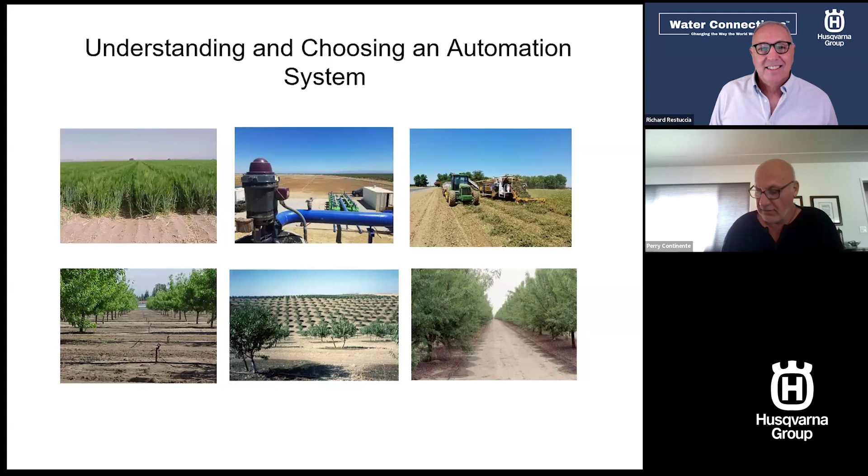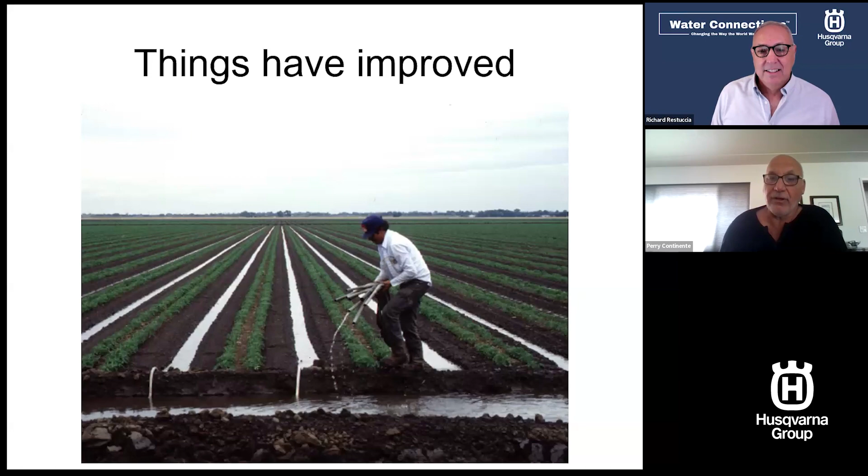Okay, first of all, this is an old picture of the way it used to be done pretty much everywhere. And first of all, is your system automatable? Can you automate a system? Well, this system obviously cannot be automated. Is your system worth automating? I mean, the first thing you want to do is make sure that your system is sound, has high uniformity, a proper application rate. And before you move towards automation, make sure that you're not spending money on something that needs to be fixed from the ground up.

Perry, if I was trying to determine if my system was worth automating, how would I do that? You might first have it evaluated, so you can do an evaluation, see what the uniformity is of the system that you have, and what the application rate is, and how many inches per hour are you putting on, and is it enough to meet the demand at the most critical time? And if those two answers are yes, then you move forward, or maybe it's a new system.

So there's lots of systems out there, whether they're new or if you're beginning just the planning of your system, plan for this. Or if you have an existing system, you need to look at some of the things and determine what changes you might need to make in order to make it a system that you want to automate. Yeah, and who could do that evaluation for you, right? If I wanted to hire somebody outside my own company or my own family. I would say Cal Poly San Luis Obispo in California, and there are probably a number of.

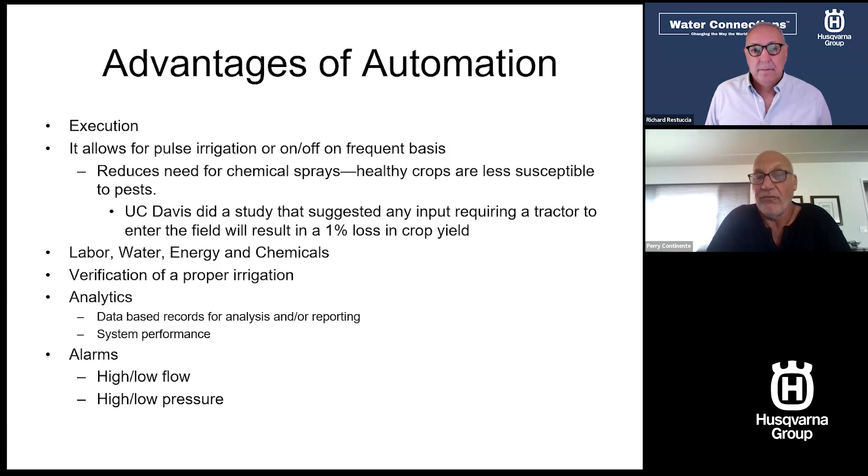Yeah, all great points, Perry. I can't even single one out as more important than the others. But I look at that high pressure, low pressure. Boy, that's a telling measurement. Yeah, because everything is a snapshot in time. Things change over time. So, your filtration gets challenged maybe more at some times of the year than others, and you need to react to it.

So now we're going to talk about choosing the right automation system for you. The first thing you want to do is figure out what you'd like to accomplish by your automation. There's all kinds of things that can be automated: cooling in Washington apples, for instance, frost protection, irrigation. And do you want real-time information when you're irrigating? Do you want to have that information on your phone, on an app? It seems that's the big thing today that I would make sure that you had.

Certainly you could buy a less expensive timer and plug it in, but then you would not have all of the benefits of what's available today. Okay. And of course, there's other things that I haven't thought about. It seems like everyone comes up with a different idea, and we'll say, yeah, we can do that. For the most part, most challenges can be overcome.

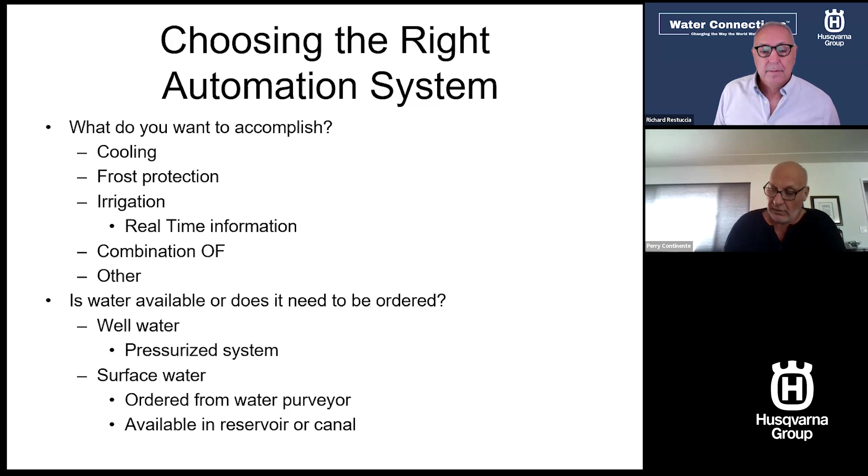So some tips. Whatever you do, get it in writing. Make sure, because people forget what they were promised. So I would say, make sure you get it in writing. What will it do? What do you expect it to do? Do you expect it to start your pump for you, or is your pump already on? Is it a pressurized system?

What about valve control? How many valves can you open at one time? Make sure that you ask the person providing you with the automation system how many valves you can turn on at one time. And in the future, maybe you want to turn on more than what is possible with the given system. What's the support like? Do they have a 24-hour support system, or is it just one person who did it for you? And if you can't get a hold of him, then you're out of luck.

And the last thing, the most important thing in my view, is that anything needs to be able to run manually. I need to be able to walk up to it and turn it on, whether it's a fertigation machine or a pump or whatever else you have, because the internet can go down. You can lose your phone. There's all kinds of things that may require you to walk up to it and just turn it on to get water out there.

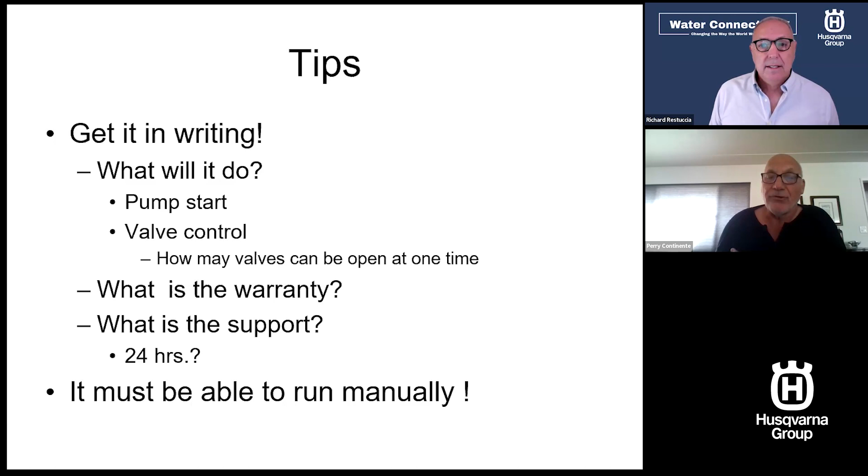Yeah, because the road is really littered with people who have spent a lot of money on automation that never really worked for them. And so I really think that you should guarantee it. You should say it should do exactly what we say it's going to do, or we have to take it back or make it work. Yeah, great points. Anyway, the last thing I'll say before I move on is it must be able to run manually.

Some of the system components and considerations are, do you have a centrifugal pump? Do you have a short coupled turbine pump? Do you have a deep well pump?

How about water meters and valves and solenoids? Something like a butterfly valve is pretty much not automatable. You have to either change it to a butterfly valve that works electrically, which requires batteries and maybe a solar panel, or you have to use a hydraulic valve. And typically in all automated systems, we're going to use hydraulic valves.

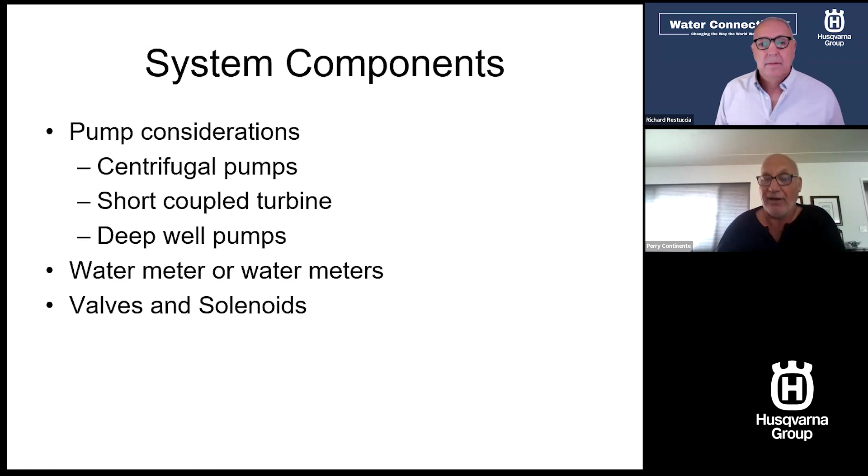Okay, here's just a picture of a typical installation, a short coupled turbine. You can't tell it's a short coupled turbine by looking at it, but it is. And I want you to notice that down below there's a means to protect the pump with oil, and that needs to be automated, right there. So make sure that your pump protection and pump lubrication and things of that nature are taken care of automatically. Otherwise, you can't automate the system, or you're automating the system without fully automating it and causing issues.

Perry, we got a question coming in here now, and this is it: how do I know what pump to pick? We know one of the least understood items in irrigation is pumps, and why I should pick one pump over another. Maybe you could touch on that, not the manufacturer or brand, but what types of pumps you like to use.

Well, in automation, we like either a flooded suction, which means that the water level is higher than the inlet on a centrifugal pump, or a short coupled turbine or a deep well turbine. And the reason for that is because it doesn't require priming. I'll show you a couple pictures on my next couple of slides of a centrifugal pump. And with the centrifugal pump, you have to make sure that it's primed, and that can be a problem for automation. Yeah, priming sounds like I need to be there to do something.

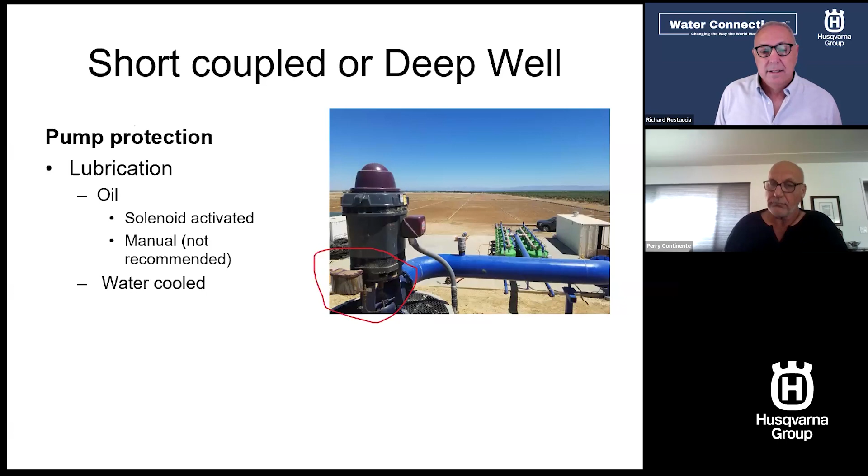And the other thing that you need to be concerned about with these, they'll typically have some kind of pump protection, which is a pressure switch. And that pressure switch, in many cases, needs to be bypassed physically by hand when you turn the pump on. If that's the case, you can disable that, and then the automation system will protect the pump from running dry with a water meter hooked up to it, so that the controller has information that says if there's no water here, turn off the pump. And that's also very important.

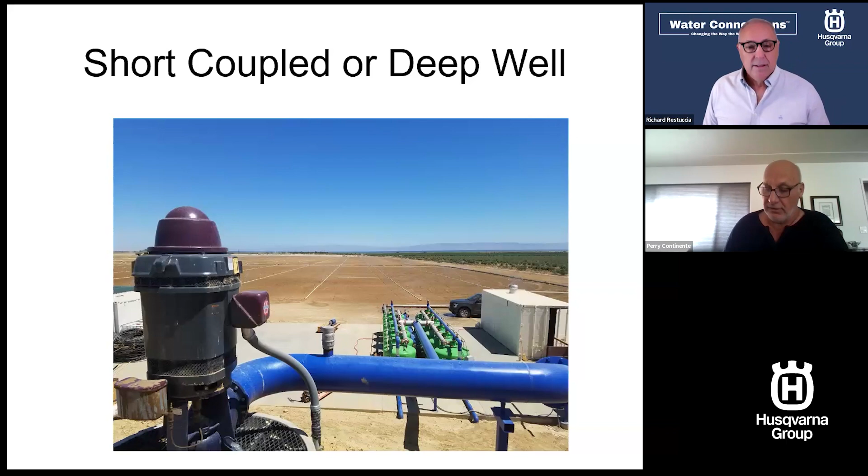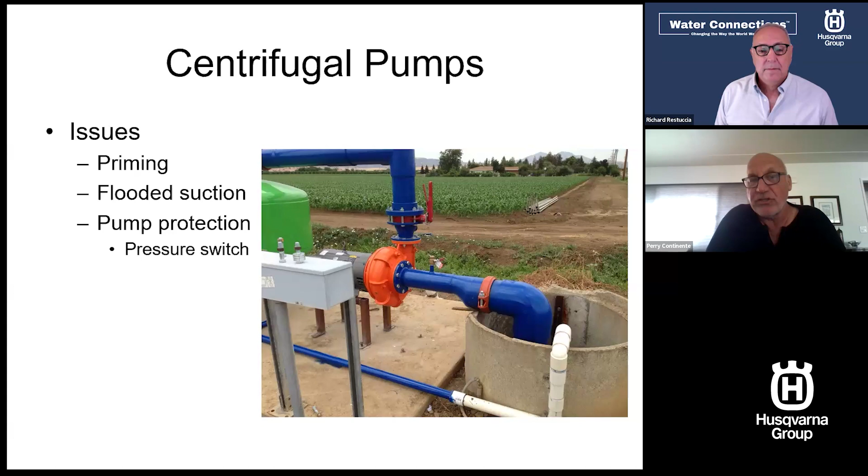So we're back now to issues of priming. If it's flooded suction, if the water levels are higher than the intake of the pump, then you don't need a short coupled turbine. But you certainly need to be concerned with the pressure switch, and you need to make sure that you have pump protection within the automated system that you're purchasing.

For instance, does it require what's referred to as a dry pulse, an open collector, or 4 to 20 milliamp? Is the length of the pulse, how long it makes contact, programmable? And will your clock read it? Will the automated equipment that you're purchasing read that pulse? And so you need to make sure that you have compatibility.

So we've got another question coming in, Perry, and it has to do exactly with what you were saying. How accurate can these water meters be? Can I rely on the information, and how much am I going to have to pay? I realize you're not selling water meters, so if you could just put it in general terms, what we might have to pay.

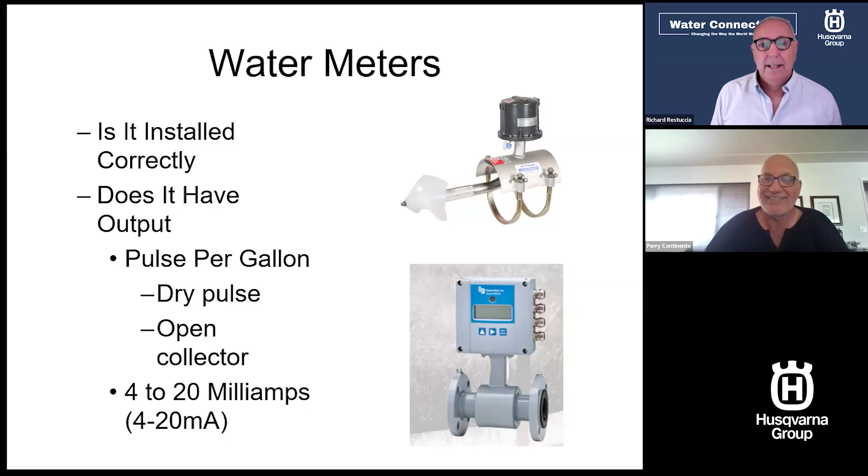All right. Just valves on and off. First of all, how many valves will be required to be open at one time? Make sure that you specify that, because that'll be a major driver of the kind of system that you purchase. There are systems where you can have as many valves open as you want at any time. There are systems where typically you can only have 4 to 5 valves open at one time.

And for many systems, that's not a problem, because we're going to open maybe 2 or 3 valves and close those valves, and then open another 2 or 3 and move on. Other systems, maybe for frost control or whatever reason, you may have more than 5 valves that you need open, and then you may want to use a system that allows that.

So I was going to ask, what's a situation where you would want to open all your valves at the same time? Let's say frost control, where you're not so much worried about the uniformity of the system as you are just protecting it from frost. And so you may have enough water to do that, and it may require that you open more than 5 valves at a time.

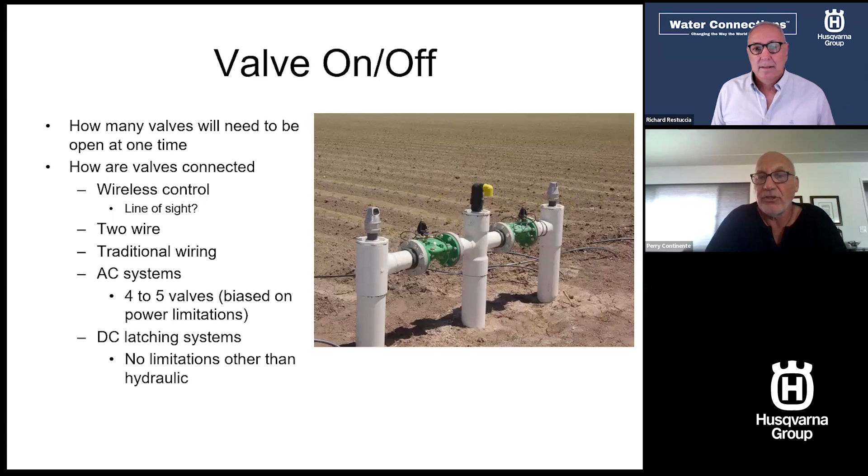That's the issue. So these are the kind of questions that you want to make sure that you understand when you look towards an automation system. Yeah, these are excellent questions that you want to cover. That's for sure. And finally, in the U.S. we tend to be really focused on time-based. And so the 2 things you need to know if it's time-based is what's the uniformity of your system and what's the application rate in inches per hour.

I believe a better way to irrigate is volumetrically. And that's either to know how many gallons you want to put on the zone or how many inches you want to put on the zone. And then your controller should be able to be set in that and to deliver volumetrically. And there you need to know, of course, the distribution uniformity of your system and the area of the zone size. And then you can establish a target for how many inches or how many gallons you need to put on, and then set your controller to that.

Yeah, the volumetric base. Do you see that much in North America? No, we don't. In the US, we're very time-based focused. In Israel, they're completely opposite. It's how much water do we want to put on in a zone. Yeah, that's interesting. It'll be interesting to see if there's a shift here or not. Yeah. Now, either way, I think is fine, but I just wanted to point out that you can do either way. Okay. Great.

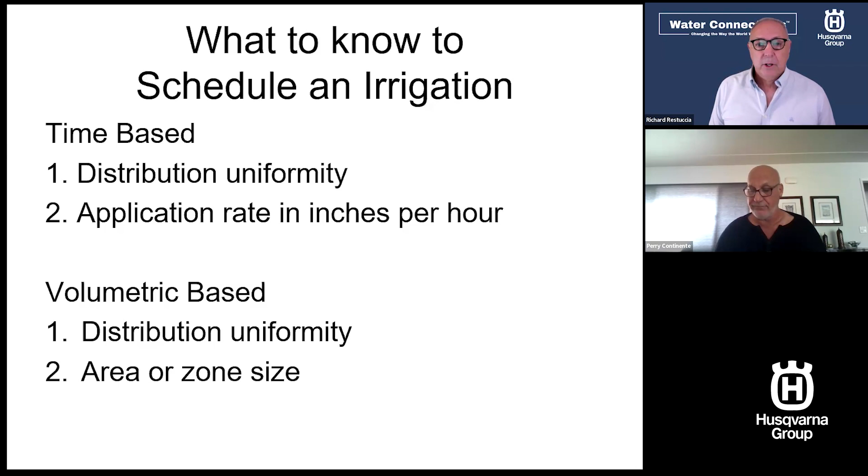And that's all I have for you today. Wow. You say all you have. That's a lot. It was a lot of good information. And certainly I do appreciate the tips, Perry, for all our viewers facing automation and trying to make the move that direction. You just saved them tons of time and money.

We have one last question, though, that I want to be sure we ask you: anybody who's been waiting to automate, waiting for better technology, do you have any advice for those that are waiting? Well, I think that things are always improving, but the systems today are very robust and easily used. The ease of use is much, much better than it used to be. I mean, there were automating systems in the 70s. So will there be better systems tomorrow? I hope so, but what will that be? I don't know. Yeah. That's a great answer though to the question of automation. You got to move now, right?

Yeah. Well, I'll tell you that my dad, when we were kids, was going to get a color TV when they improved the technology, you know? So would you buy anything but a color TV today? Yeah, no. Right, and we'll have better TVs in a year or two from now. Yeah, I'm sure that we will. We'll be swapping them out.